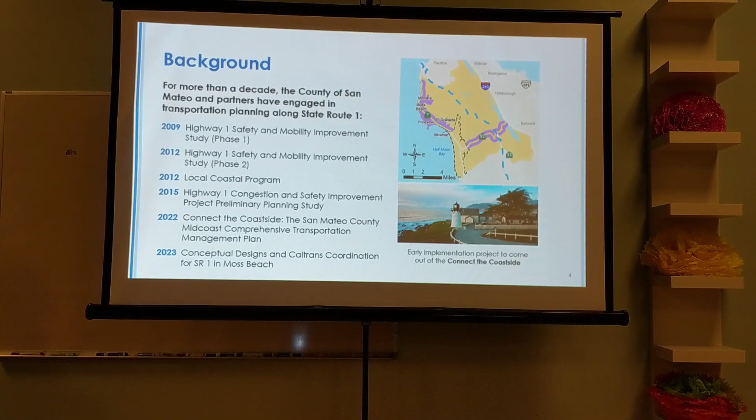So, I want to talk about what has been developed, starting off with this Highway 1 Congestion and Safety Improvement Project. This exhibit shows the limits of where we conducted the study: just north of Marine Boulevard, and to just north of 16th Street. That's the limits of what this study encompasses.

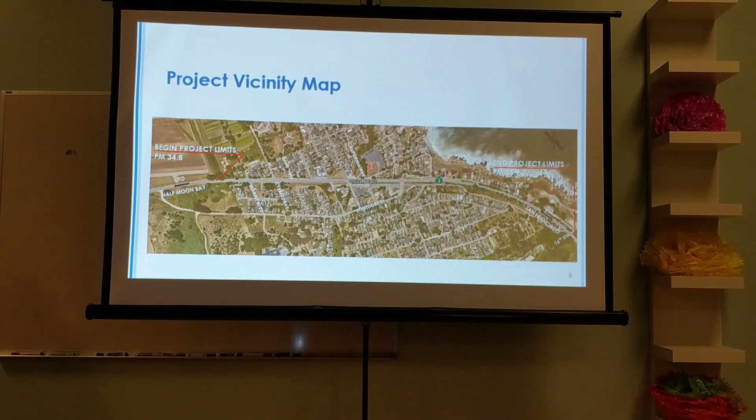As we looked at the project, we found that everything you know about the project is very true. Highway 1 is highly congested. On the weekends, there's a significant amount of traffic, which makes it hard for pedestrians and bicyclists to cross Highway 1, even as drivers at the intersection.

You want to make left turn movements. I've heard one person tell me 7.5 minutes, that's a lot, but there's a lot of times you don't have that break to make a left turn, even right turns, especially on weekends. This leads to a lot of unsafe conditions. People get impatient, they want to get onto Highway 1, and it leads to conditions that could lead to collisions, accidents, and what we call broadside or T-bone accidents, which are very undesirable for the community.

Also, it makes it very difficult for people to cross the highway. I was talking to one lady, she's a jogger, and she has difficulties crossing Highway 1 to get to the other side to continue with her jog. For bicycles, it's very difficult too. So we understand and we hear what the issues are.

All of this leads to an unpredictable travel pattern. You don't know how long it's going to take to get on Highway 1, or when that break is going to happen so you can cross. It creates uncertainty, and it's not a good feeling to have as a resident who basically lives on either side of Highway 1. So we fully understand that.

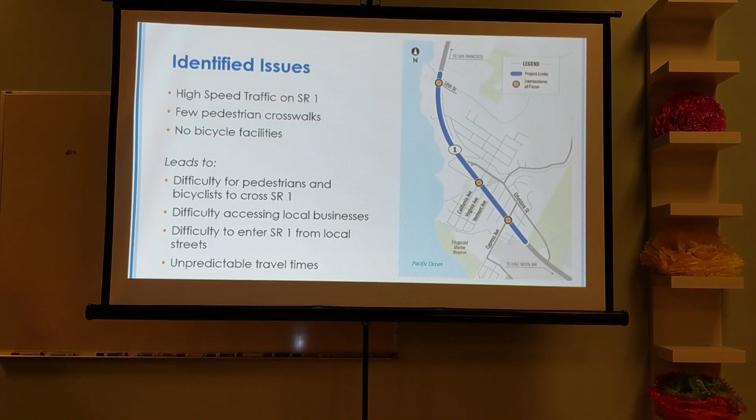So with this, the project's overarching goals are to improve conditions for all users, with a heavy focus on safety. We're looking at improving pedestrian and bicycle facilities, encouraging other ways of getting around besides driving, improving access to coastal resources, and improving operations and safety for all users within this corridor.

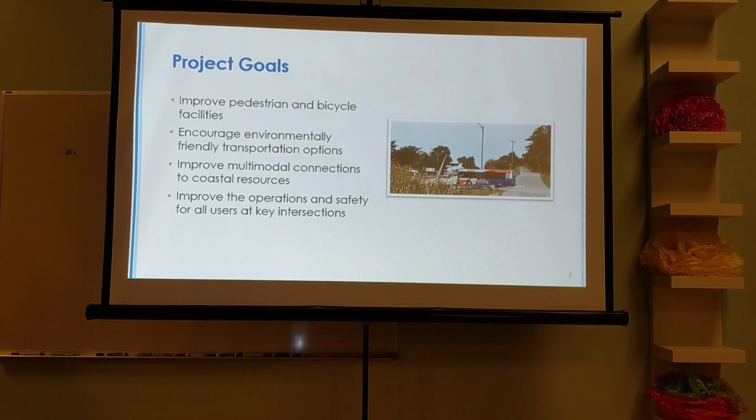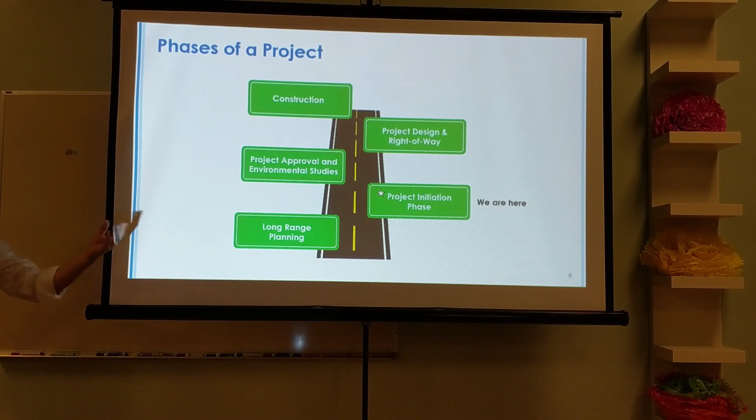Caltrans is the owner-operator of Highway 1. They have their own prescribed ways of developing a project and getting it out to construction. The first phase is complete, which is the long-range planning. With a lot of input from the community, there were, as Kanda mentioned, a lot of documents prepared, and we received those documents.

Now we are in what is called the project initiation phase. The goals of this phase are really to follow Caltrans' process, where we develop concepts, develop preliminary traffic information, develop preliminary environmental information, and package it for Caltrans' review and approval.

The next steps, once Caltrans approves the project initiation document - again, we are in the PID, or project initiation phase - it goes to the next phase, which is the project environmental studies and project approval phase. This is when the detailed traffic analysis is done, the detailed technical studies for the environmental document are done, and it brings the level of studies up to a higher level where information is shared and an alternative is selected.

Beyond that, there would be the design phase, and once through design, if any property acquisitions are needed, then it goes to the construction phase. But again, we are at the beginning phases of what Caltrans' process is to get a project approved.

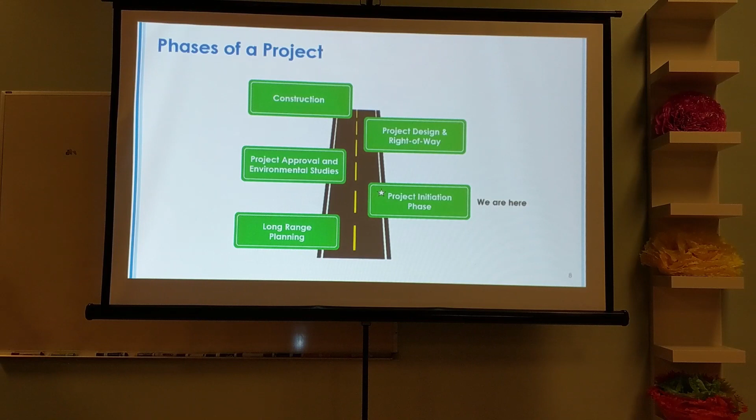So I want to talk a little more about the project initiation document, which is the current phase we're in. It's a series of technical studies that looks at existing conditions and develops concepts, which we call alternatives. I'm hoping you went back to those two tables and looked at those alternatives. So it's about developing concepts and alternatives that meet the purpose and need of the project.

So again, those are the alternatives that the team put together, and tonight is an opportunity to hear your feedback. But again, these are the two alternatives. Once the project initiation document is complete and satisfies Caltrans, Caltrans would sign off on it, allowing the project to move to the next phase, which is the environmental phase.

That's when all of the detailed studies are done, the public reviews happen, and the project is approved for the next phase, which is the design phase. Again, we're in the project initiation phase, and on this screen is a snapshot of what happens during the project initiation phase.

Based on the project goal, we've identified many existing long-term planning and range planning documents, and we've looked at the possibility of improvements in the area. The goal is to improve safety and congestion by making it safer to walk, bike, drive, and take transit.

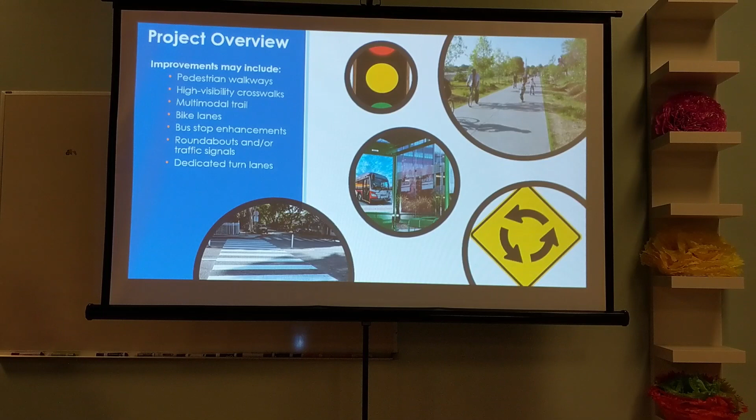So, project alternatives. Caltrans requires the alternatives to be compared against a no-build alternative. A no-build alternative is basically doing nothing to the highway—it remains as is, no improvements are made, and basically that's it. What you have is out there is what you get. Caltrans compares the other alternatives against the no-build to see what the improvements are, what the benefits are, and what the impacts are. So the first alternative is the no-build alternative.

Project Build Alternative 1 provides roundabouts at Cypress and California, with a signal at 16th Street. I'm hoping you had a chance to look at those exhibits back there. Project Build Alternative 2 provides signals at Cypress, California, and 16th. We have two options to signalize the intersection with 16th, and I'll go through that in a bit.

For Build Alternative 1, the roundabouts, there are two options. One is to provide a raised median between the roundabouts, which provides additional traffic calming and slows down speeds. But with the raised median, you could no longer make a left turn in or out—you'd have to go to the roundabouts to make a left turn onto Highway 1. You would still be able to make a right turn, but to make a left turn onto Highway 1, you would have to go to either roundabout.

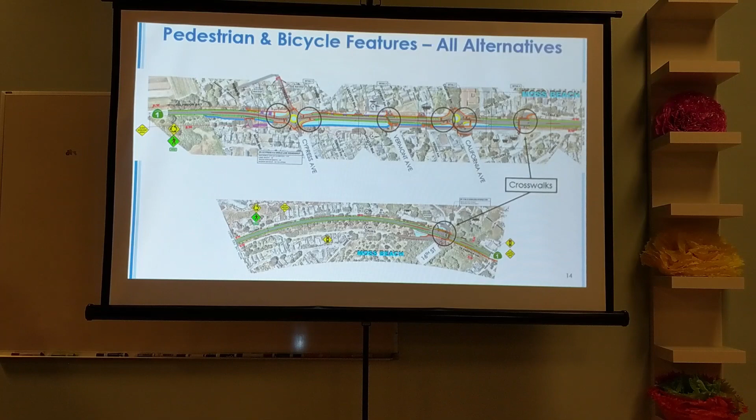This is the image again, showing roundabouts at Cypress and California and a traffic signal at 16th. The big benefit of roundabouts is that they eliminate certain types of crashes, which is the broadside or T-bone crash. You no longer have somebody having to push through. It eliminates those types of crashes.

It's what drivers want, and I've heard from the community there have been broadside accidents in the past. But the roundabout slows down traffic, allows people to go around, and eliminates these types of collisions. A roundabout is a traffic calming feature - inherently it requires people to slow down, and the roadway will be designed for that lower speed so they're able to maneuver through the roundabout. So traffic speeds will be reduced with the introduction of roundabouts.

Roundabout traffic will not come to a stop. They will continue to flow, and the only time they would stop is when there is a pedestrian crossing at the crosswalk. Otherwise, the intent of a roundabout is to have continuous flow of traffic.

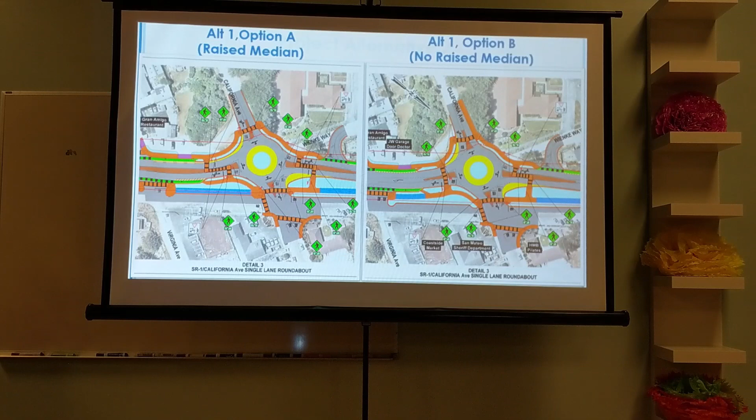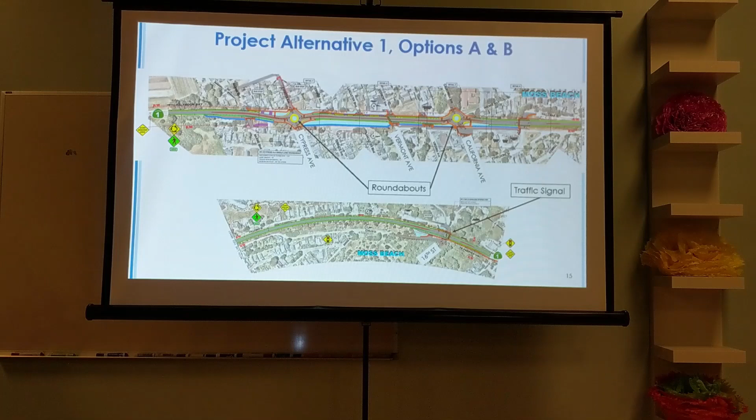Can you show an example of not being able to make a left-hand turn on this? Yeah, I'm confused - can you make a right turn and go around the roundabout? Let me go there. So if you're on Virginia, you go back? Did you go to the bigger one? Which one is that, the one you just got? Forward, yes, go forward. I'm just gonna come back.

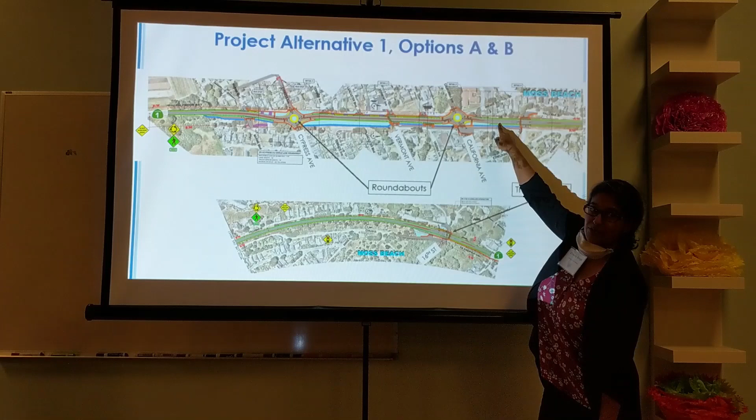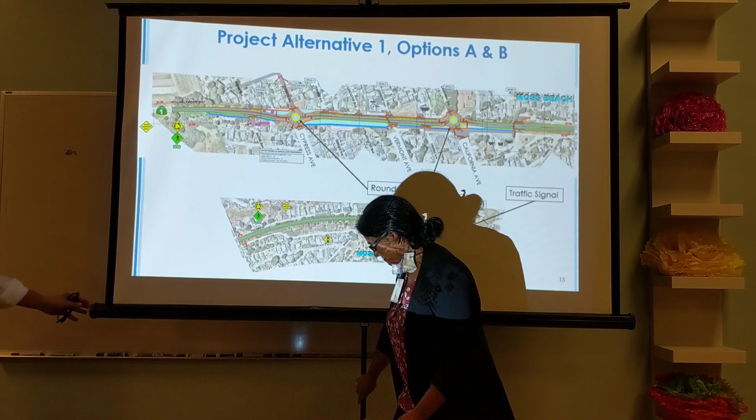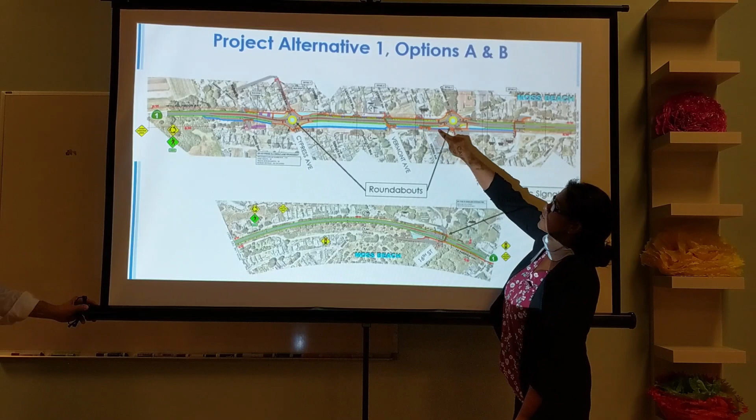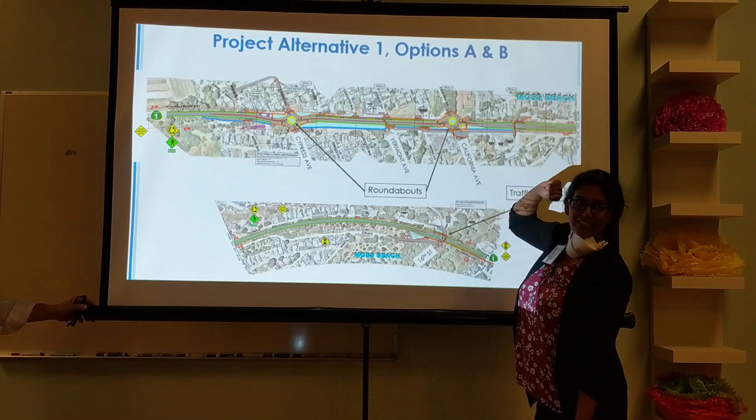Okay, so if you're on Virginia, on the west side of the highway, and you want to go north on Highway 1, you can't because there's a median in the way. So you will have to make a right turn, go south, go through the roundabout, and then come back around. If you wanted to go left, effectively you can't do it because there's something in the way. So if you're anywhere on any of these streets in between, you'll have to do that movement - go south to go north. Does that make sense? Yep. Does it make sense, everybody?

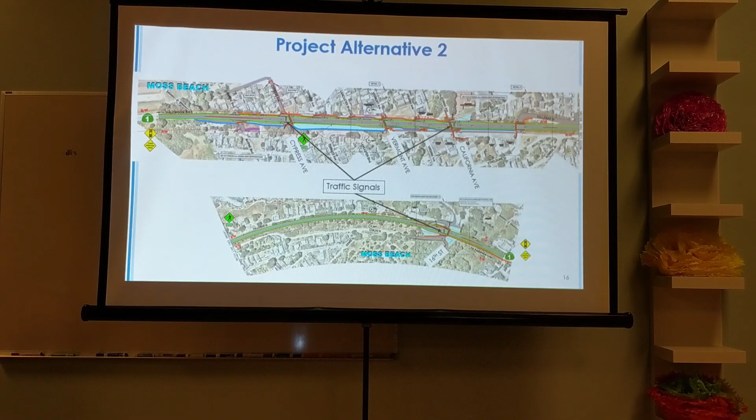Oh, thank you. But also, if you just want to go - say you're on Carlos and you just want to keep going on Carlos, you're going to have to... No, you just go, then you just go home. Well, let's go through and then we'll come back.

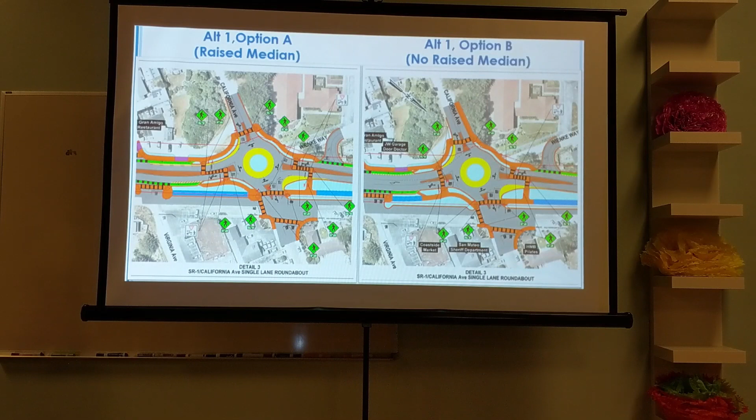Thank you. Okay, here I'd like to talk about the intersection at 16th Street. We looked at putting in a roundabout at this location - the terrain is higher on this side, there's a creek on this side over here, and we put in the roundabout and determined that it's not the ideal location for a roundabout. It requires retaining walls, there are utilities that have to be moved out of the way, and there's a series of complications that made us feel it's not the appropriate location. So what we're proposing here is a signalized intersection.

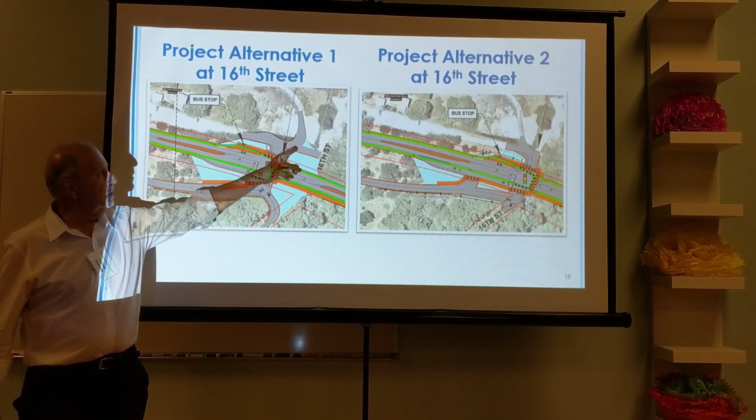Now with the signalized intersection, we came up with two options. One is to take the connection from the Montara Sanitary District and the access to the hostel and the lighthouse and shift it from where it is to line it up with Carlos. That's one option. The second option, shown over there, is to extend Carlos.

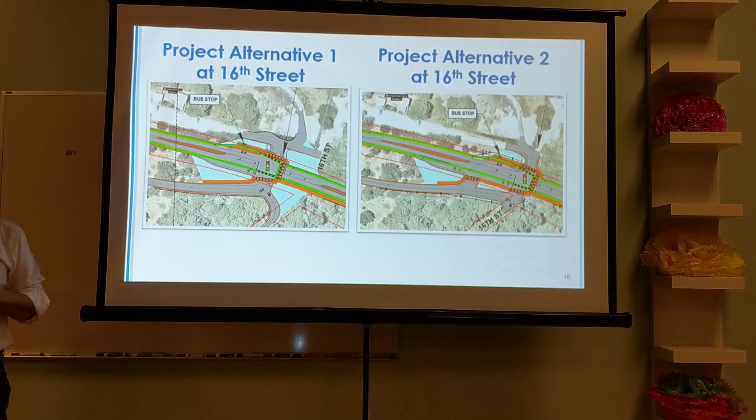Right now there's an informal path there, but we'd extend that with a roadway into 16th Street and create the signalized intersection at 16th. We would propose to maintain access to Carlos for northbound traffic, especially trucks, to make that maneuver onto Carlos - so you can make a right-in ahead of the signal into Carlos, but if you want to exit and make a left turn, you would need to go to the intersection, which is signalized. The intersection will have a crosswalk, an enhanced bus stop, and in this case we are connecting a walkway between 16th and 14th Street to access the bus stop in the northbound direction, just north of 14th Street.

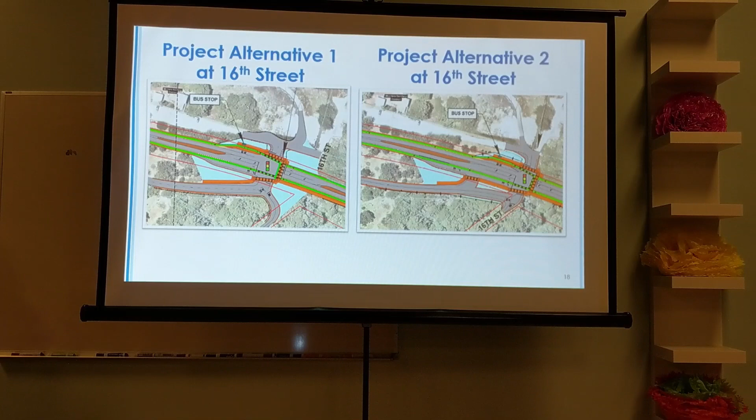I have a question. Why 16th Street? At this point in time, there is very little traffic that leaves out of there. Are you prepared? We will take questions at the end. Thank you, but why is that an alternative? We're gonna get through the presentation so we can have a good recording for online, and then we will take questions. We appreciate your comments, just give us a few more minutes, and we'll answer your questions, please.

During this initial phase, we conducted a preliminary traffic review, and there's about 17,000 vehicles that drive on Highway 1 on a daily basis. That's an average, with the highest being on the weekends.

The observations are quite evident: there's continuous high speed along the highway, and there aren't enough gaps to provide safe access to make a left turn if you're driving, or for pedestrians or bicycles crossing to access the coast side or businesses. It's something you already know, and we have confirmed this.

Free flow traffic, it takes about a minute and a half on Highway 1 to go through Moss Beach. We've seen, and I've heard that maybe this is on the high side, but it could take 7 minutes to cross sometimes on the weekends to access Highway 1 with the amount of congestion up there.

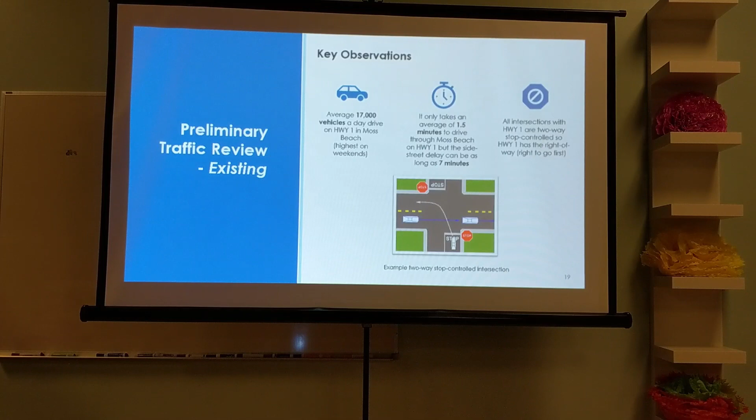It's bad, it's congested, and it could get worse with additional growth out there. The forecasts show that demands for our highway systems always increase, so it is going to get worse, and side street delays could also get worse.

The concept of roundabouts, as with signals, is really intended to provide more gaps in the flow of traffic and slow the overall speed through Moss Beach. This would help the community where you're walking or biking across, with the slower speeds and gaps allowing safer passage.

As I mentioned before, this is the project initiation phase. During the next phase, the project environmental studies and project approval phase, a more detailed traffic analysis will be done. Here we assess what we know with existing data and observations, but the more detailed phase would be in the next phase of the project.

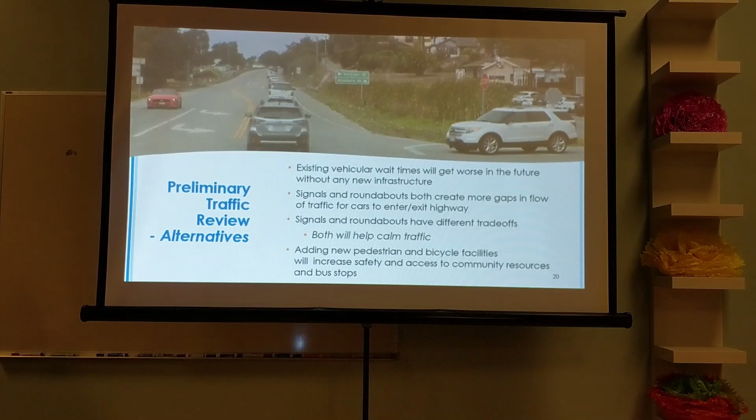Many of you have seen the video simulations. What we try to simulate is to provide a view of what a roundabout would do and what a signalized intersection would do in terms of the queuing on the side streets. We've seen there is a great benefit for the amount of traffic that queues up on the side streets with roundabouts and signals.

The simulation here provides weekend midday traffic where the waits are the worst. Some of the preliminary models show that the wait times on the streets could be reduced by 40% or more compared to doing nothing, the no-build alternative.

Again, if there is an opportunity after this session, please, I'd be happy to answer any questions. I'll be over there after this session is done. With this, I'd like to turn it over to Catherine to talk about the environmental review phase.

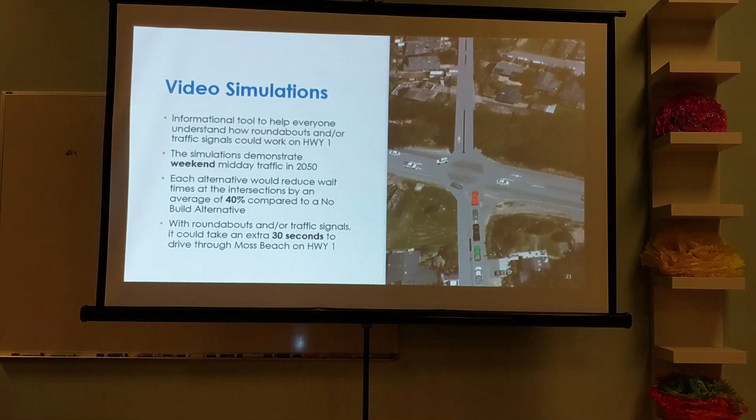Thanks, Anthony, I'll keep it super sweet and simple here. I am the environmental lead on the project. I've recently finished this preliminary environmental review, and I found out what you guys already know, which is that this is a really sensitive biological area.

There are 3 creeks that cross within the project area. There's wetlands, even under the new rules. There are endangered species habitats, with endangered species living right along the side of the roadway. There may be potential buried archaeological resources here.

We're going to take some time to study that very carefully and coordinate with those folks that we need to coordinate with. We know there's going to be permits and mitigation required in order to build any version of this project.

We anticipate in the next phase, the environmental phase you've heard a little bit about, that we would be preparing a mitigated negative declaration for CEQA, not a full EIR. We think we can do this with a mitigated negative declaration, and we'll need mitigation for biological impacts. If we find something unexpected as we do that work, then of course we would change that to an EIR, as required by law.

At this time, based on this preliminary environmental review, we think that we can do that with a mitigated negative declaration. This still gives you guys an opportunity to come back again and see, okay, this time we're for real about these alternatives - which ones do you like most and we really want to pick. Tonight, we're really thinking about what parts of different things we like most and why, and how we get those incorporated into the next phase when we're getting more serious about that time to pick. We anticipate federal funding and federal permits will be needed, so we would do an environmental assessment to satisfy the requirements of NEPA.